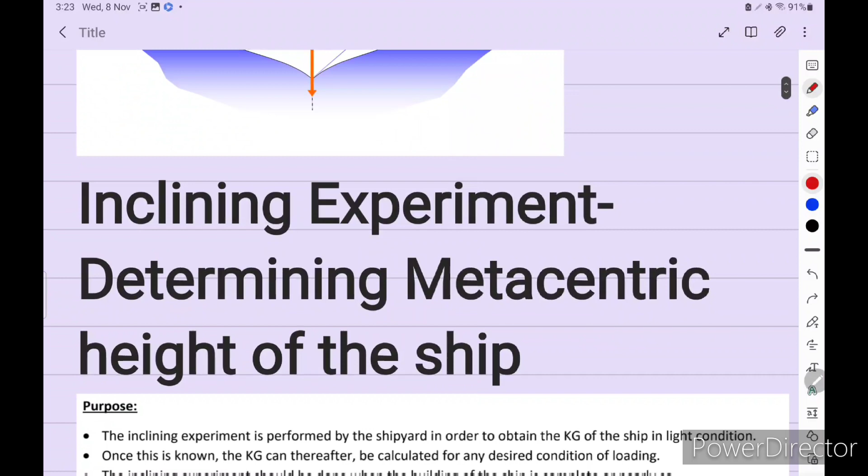Okay, so inclining test, inclining experiment, for determining metacentric height of the ship.

What is the purpose of this test? The inclining experiment is performed by the shipyard in order to obtain the KG of the ship in light condition. This is performed by the shipyard when the vessel is ready to launch, and it is done in the presence of class and flag state. Once this is known, the KG can thereafter be calculated for any desired condition of loading.

The inclining experiment should be done when the building of the ship is completed or nearly completed.

What is the principle? 2 or 3 long pendulums are rigged on the center line of the ship, one forward, one midship and one aft. List is created by moving several known weights, usually 2 or 3. Results obtained by different pendulums are averaged. By knowing the deflection of the pendulum, plumb length, KM, displacement including known weight, and distance moved, the initial GM is calculated. The calculated GM is then GM fluid for that condition.

What is the procedure of this test? The 2 or 3 long pendulums are rigged on the center line of the ship, one forward, one midship and one aft. The bob is immersed in oil or water to dampen out oscillations. A horizontal batten graduated in centimeters is fitted above the plumbs.

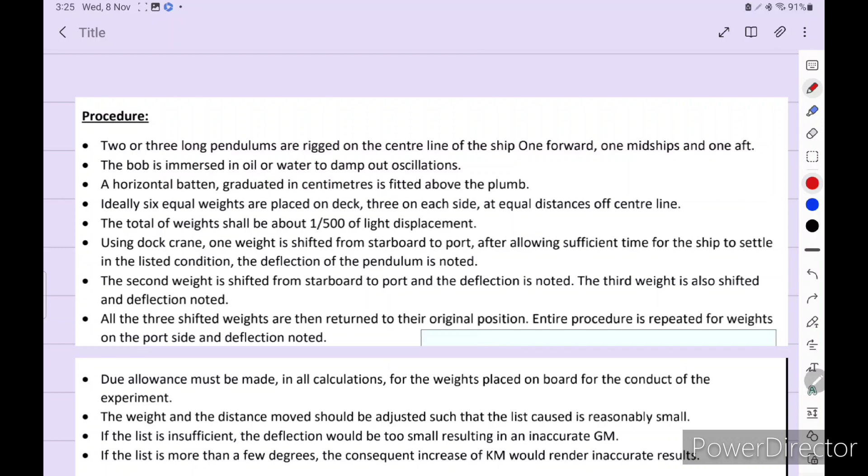Now the question is also what precautions you should take while conducting the experiment. So we have some precautions. Before the commencement of the experiment, the ship should be perfectly upright. A large trim should be avoided.

The ship's initial GM should not be too small. There should be no wind. If this is not possible, the ship should be headed into the wind. All mooring lines to be slack, gangway to be well clear of jetty, no other craft to be alongside. The depth of water should be enough to ensure the ship is freely afloat throughout the experiment.

All portable beams, derricks, boats, etc. to be in proper seagoing condition. Any loose weight to be secured. All personnel not directly connected with this experiment should be ashore. Those on board should stay on the center line.

Boilers are to be completely empty or full. As far as possible, all tanks should be fully full or empty. If not possible, the value of free surface effect should be noted. All bilges to be dry, drafts forward, aft and midship, and the density of water to be noted accurately. All persons doing this experiment should wear the proper personal protective equipment.

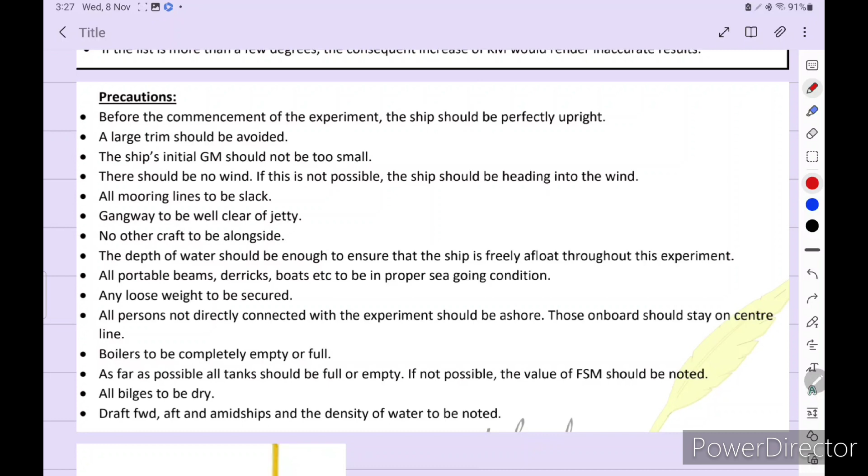Okay, so all these precautions should be taken care of. And this is a pendulum which we need to put in oil or water to dampen oscillation.

Okay, so this is a triangle. If you see this triangle ABC, tan theta is equal to BC upon AB.

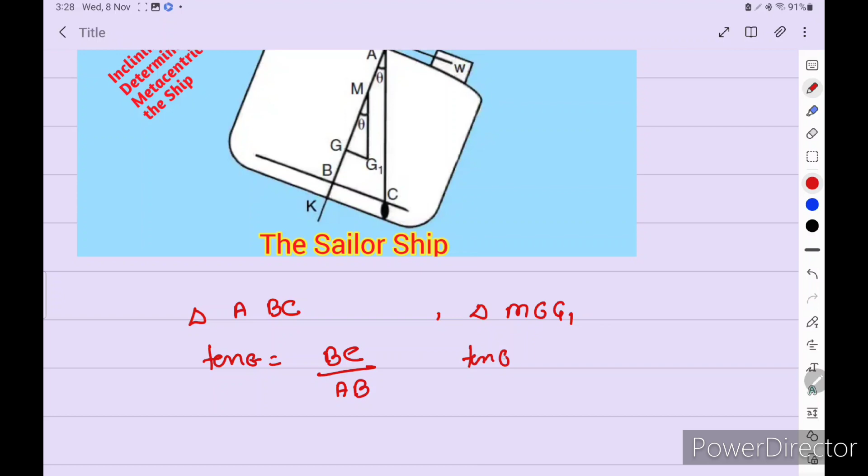And in triangle MGG1, tan theta is equal to GG1 upon GM. So tan theta is common, so BC upon AB is equal to GG1 upon GM. So GM is equal to AB into GG1 upon BC.

Now since we know that GG1 is equal to W into D upon displacement, so GM equals W into D upon displacement into AB upon BC. So this is the formula of the inclining experiment.

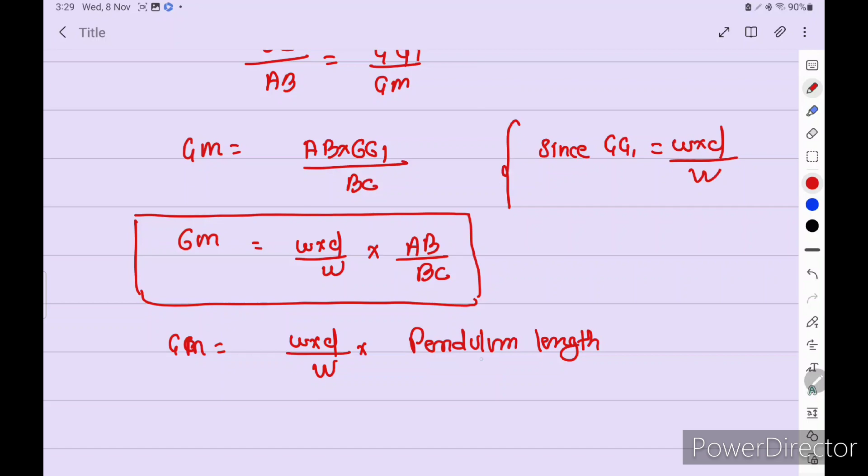Now, GM is equal to, what is AB? AB we call the pendulum length, so GM equals W into D upon displacement into pendulum length, divided by BC, the deflection. So our formula is this one. This formula we are going to use in the numerical.

Okay, what is W, small w? Weight shifted, port to starboard, starboard to port for the experiment. D is the distance through which it is shifted.

Capital W is final displacement. So we know the W, small w, we know the D, we know the total displacement. Deflection we find out from the experiment, and pendulum length we know. So all we know, so that we can find out GM. And when we find out the GM, the KM is provided by the naval architecture, and we know the KM, we know the GM, we can find the light ship kg, which is required of this experiment. The whole experiment is to find out the light kg of the vessel.

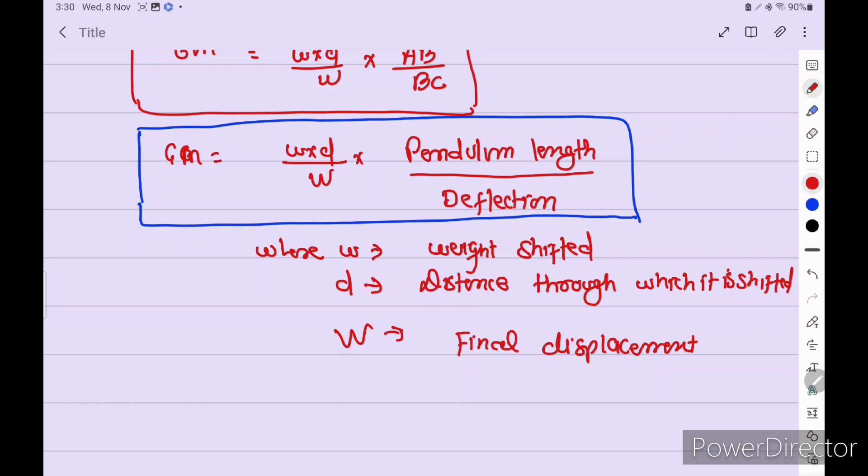Now we are going to do some past paper, so that you will be able to solve this type of numerical. For a displacement of 4000 ton, a mass of 12 ton is shifted transversely across the deck. A deflection of 75 mm in a plumb line of 7.5 meter was observed. If the km is 10.2 meter and the kg is 7 meters, find the distance through which the weight is shifted. Okay, so let's solve this.

What is given in the question? Displacement 4000, mass of 12 ton, so small w is 12 ton, shifted across the deck. A deflection is given here: 75 mm, so we need to convert in meters, all should be in 1 unit, so 0.075 meter. Plumb line is already given in meter, plumb line is 7.5 meter. Km is given, kg is given, so you can write km is 10.2 meter, kg is 7.0 meter.

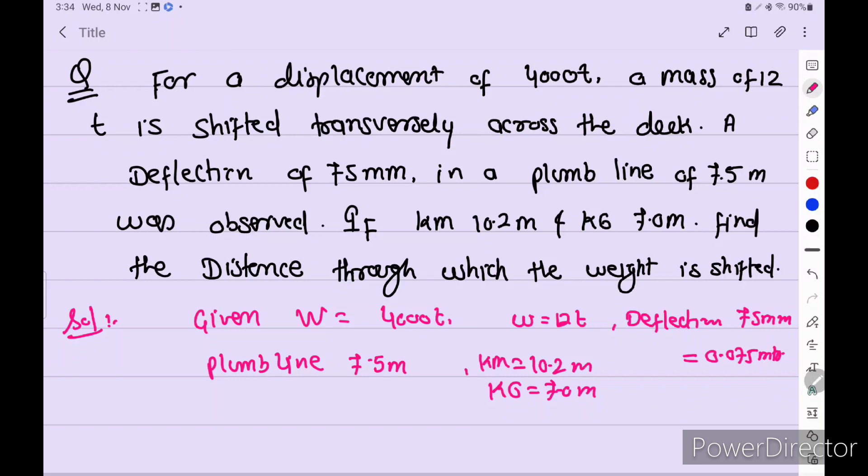Find the distance, that means D, we need to find D through which the weight is shifted. So our formula is, first km is given 10.2 meter, kg is given 7 meter, so GM we can find out, 3.2 meter. Now since we know that formula, GM is equal to W into D upon displacement into pendulum length divided by deflection.

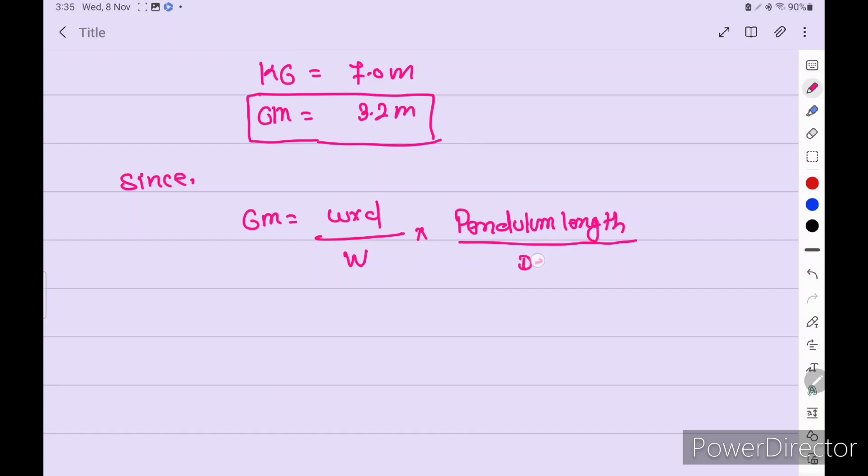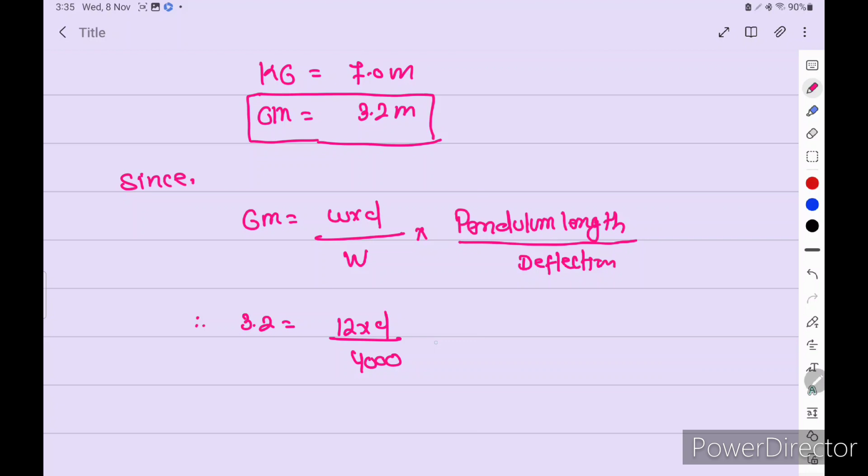Now put the formula. GM is 3.2, we just calculated. D we don't know, we have to find out. 4000 into 7.5 divided by 0.075. Cross multiplication: 3.2 into 4000 into 0.075 is equal to 12 into D into 7.5. So we get 960 is equal to 90 D. So D is equal to 10.67 meter.

Okay, let's move to the next MMD question. An inclining experiment was conducted on MV Hindship with all tanks and compartments empty except 28 ton each of diesel oil in the number 7 port and starboard tanks, and also 12 tons each of fresh water in the tween deck drinking water tank port and starboard. When the inclining weight of 5.75 ton at kg 10.2 meter is shifted transversely through a distance of 16.95 meter, plumb line is 8 meter in length, deflection 5 cm. So plumb line is 8 meter and deflection is 5 centimeter, which we need to convert into meters. Calculate the light kg and GM of the vessel.

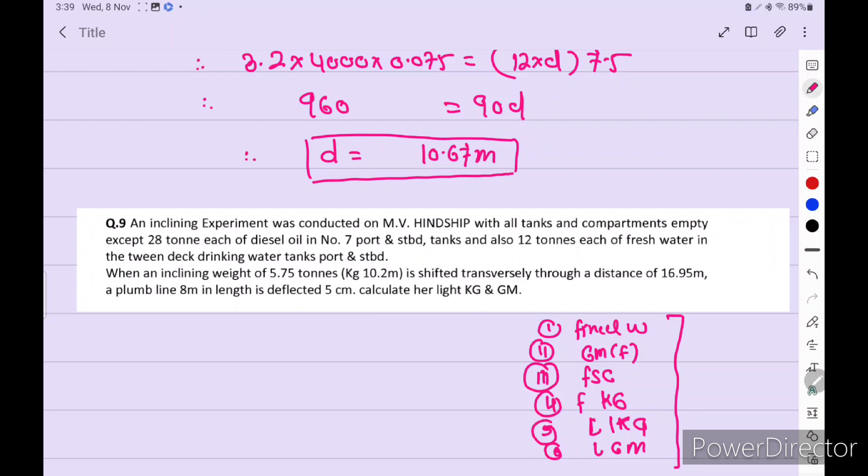In this type, generally the question comes this way only, so there is a procedure to do this. First we have to find out the final weight, then GM fluid, then we have to calculate the FSC, then we have to calculate the final kg, and then we have to find out the light kg, and then we have to find out the light GM. So this is the procedure. If you remember this procedure and solve 2-3 numericals, you will be comfortable solving this type of numerical. Let's solve this numerical.

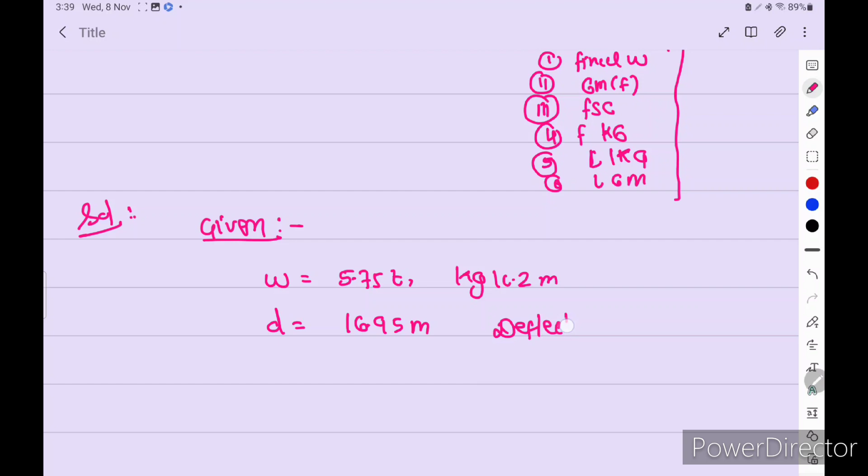What is given in the question, we have to write in examination, so that it makes a good impression for the examiners who will correct our paper. So small w is 5.75 ton, kg is 10.2 meter, d is 16.95 meter, deflection is 5 cm, so we need to convert into meters, and plumb length is 8 meters.

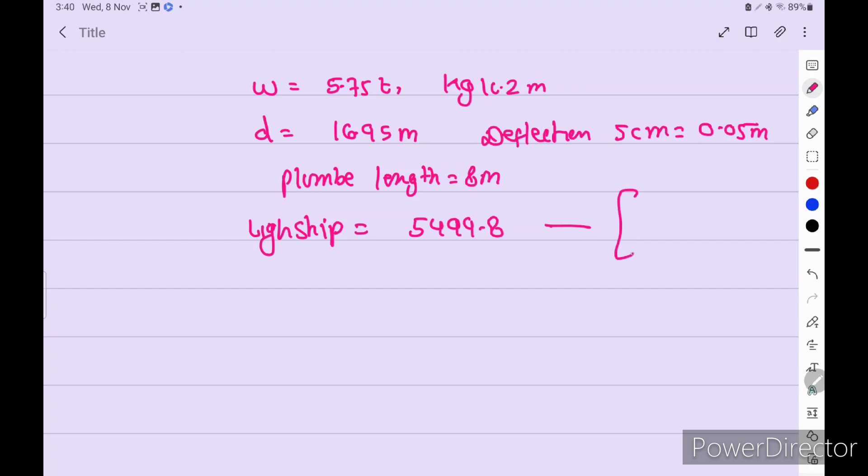Now from the MV Hindship particulars we need to find out the light ship. It is given on the first page, also in condition number 7 you find the light ship displacement. From MV Hindship particulars, or the first page where the LBP is given, you can find out the light ship displacement: 5499.8, this you have to remember, this is fixed, or you can find out from the MV Hindship particulars. Now the number 7 port and starboard is 56 ton.

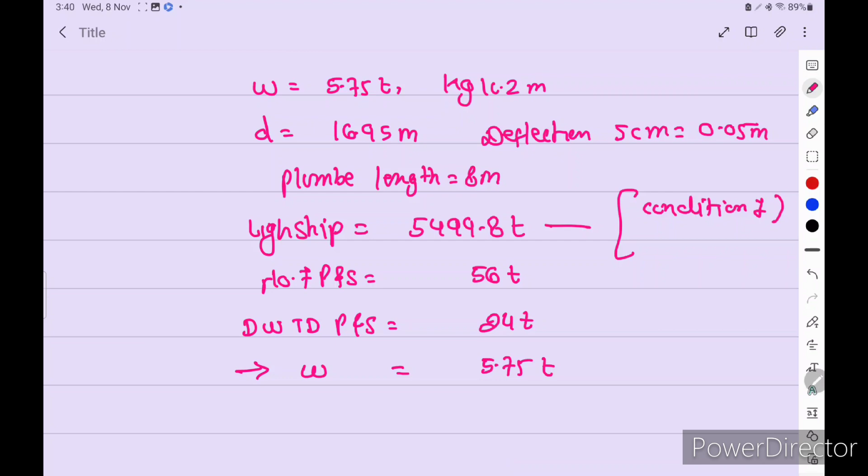Drinking water tween deck port and starboard equal to 24 tons. Small w is given 5.75. Never forget this small w, this is very important, otherwise your answer will become wrong. So small w is also we have to consider.

So final displacement is equal to, we have to add all this. Final displacement is 5585.55 ton. Okay, this is final displacement.

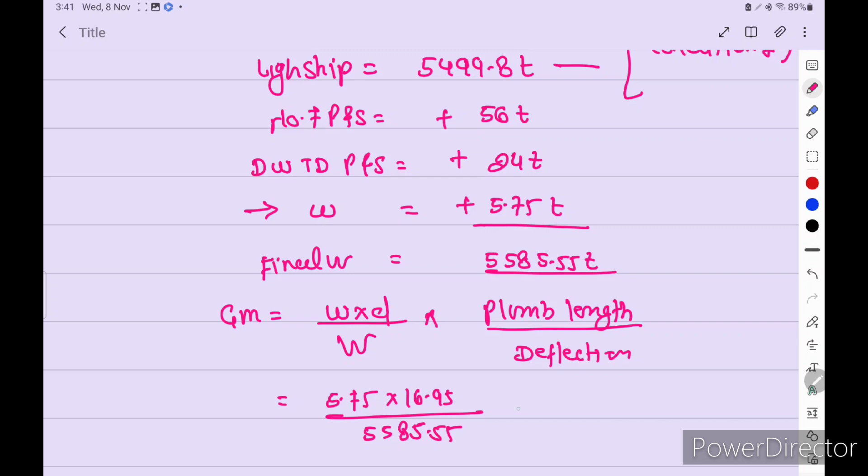Now for our formula, GM is equal to W into D upon displacement into plumb length divided by deflection. Put the value in the formula: 5.75 into 16.95 divided by 5585.55 into 8 divided by 0.05.

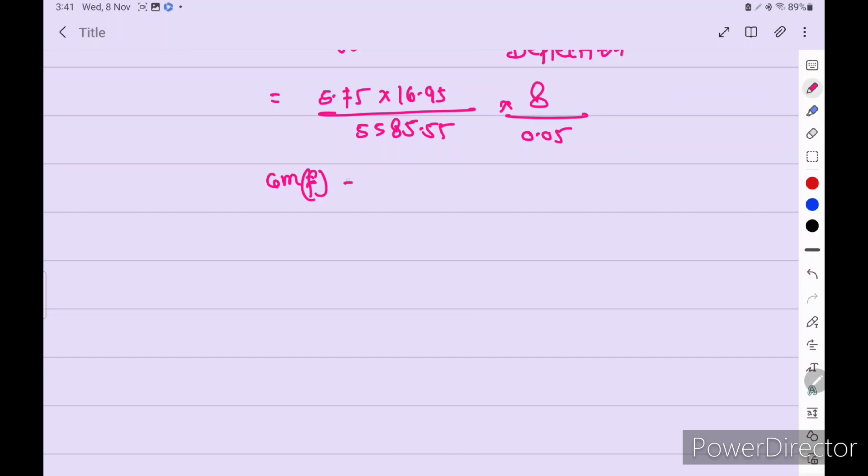So GM fluid we get 2.792 meter.

Okay, now we need to find third step, FSC. So what is FSC formula? I into DI.

Okay, now DB tank, 7 port, 50 into 0.88. This 50 we have to find out from the MV particulars, and 0.88 is the density, so we multiply and we get 44. 7 starboard is 33 into 0.88 is equal to 29.04, so we need to add this, 73.04.

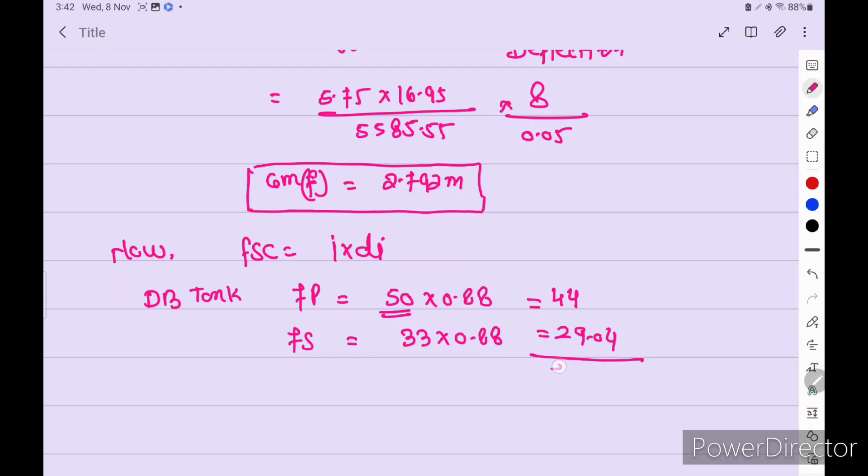Drinking water tank port is equal to 37 into 1, so 37. Fresh water density 1, and the FSM we have to find out from the MV particulars. Starboard side 42 into 1, so 42. Addition, so 79. Now we have to add the total FSM.

73.04 plus 79, so it's equal to 152.04. Now FSC is equal to FSM upon final displacement, so 152.04 divided by final displacement 5585.55. So our FSC is equal to 0.027 meter.

Okay, now for the final displacement 5585.55, we need to find out the Km from the MV particulars. So GM fluid we already calculated, 2.792 meters. FSC we calculated, 0.027. Now before we are going like this, Km minus Kg is equal to GM solid minus FSC is equal to GM fluid.

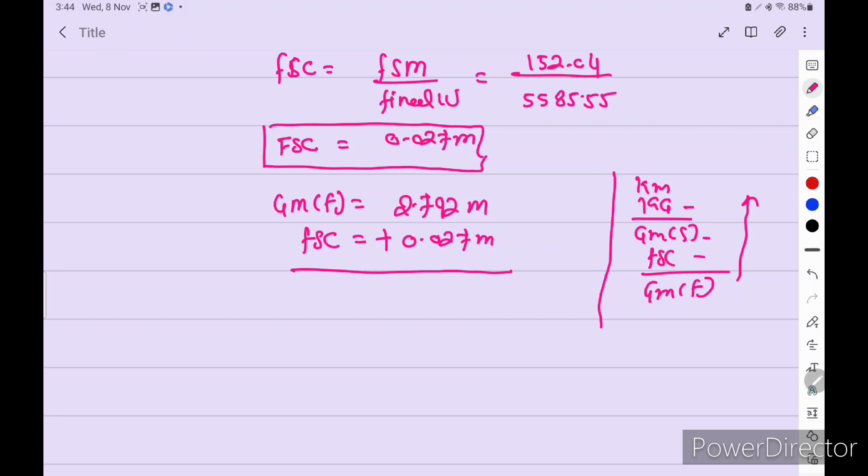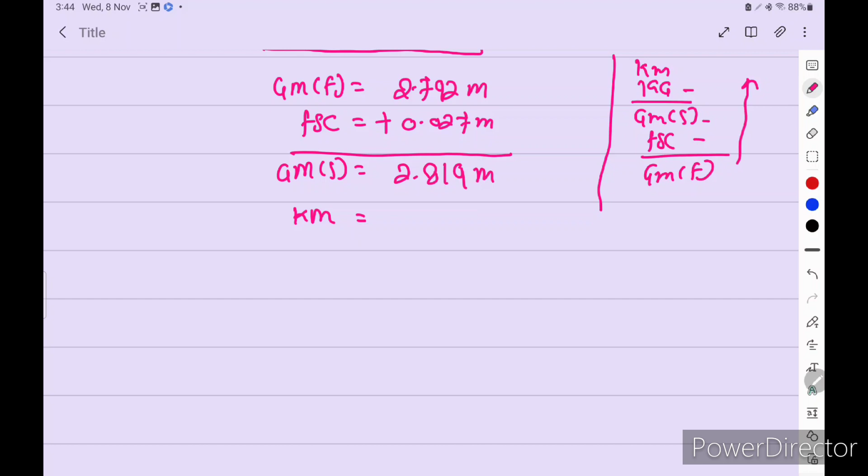Now we are going to the opposite side, so we need to add. So GM solid we get 2.819 meter. Now from the MV we have to find out the final displacement's Km, so in that case I get 11.561 meters. So final Kg, Km minus GM solid, we get final Kg 8.742 meters.

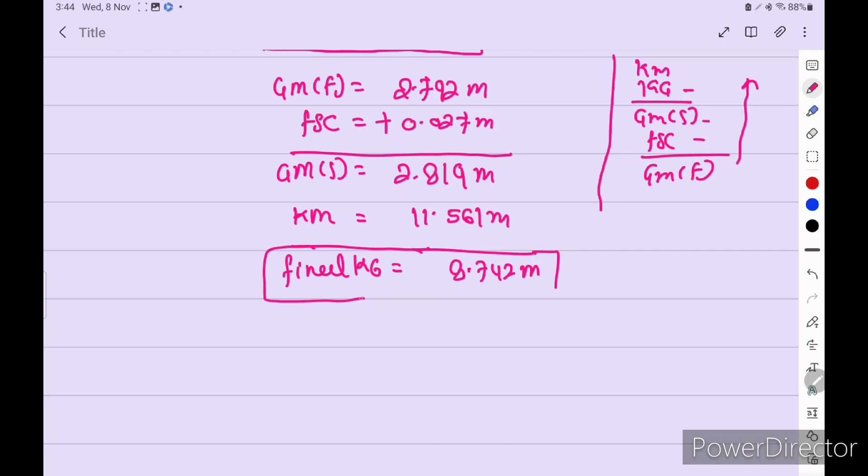But we need to find out the light Kg of the vessel. So now we go by the moment method. So W, displacement, Kg, and vertical moment.

So final displacement 5585.55, final displacement. The Kg is 8.742. Okay, this is given in the MV Hindship. This we calculate 8.742 from here.

Now 7 port is 30 ton, 7 starboard 30 ton, drinking water tank port minus 10 ton, drinking water tank starboard minus 10 ton, and the small W 5.75 ton. So we get light 5499.8.

It should be 5499.8, your light ship displacement. Put the Kg, you can find out from the MV particulars. And the small W is given Kg in the question.

So cross W into Kg, cross multiply, and you will get the vertical moment, 4882, 8.878. We have to keep 3 decimal digits after the decimal. Minus 73.36, minus 72.52, minus 134.28, minus 134.76, minus 58.65.

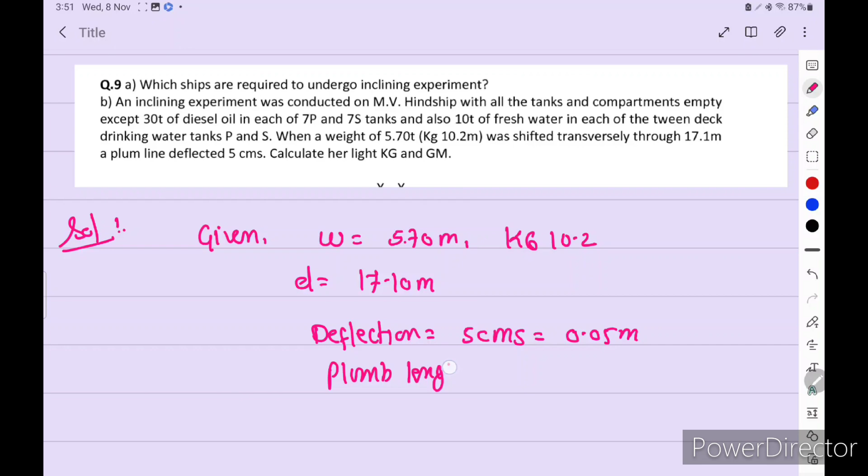So what is given in the question? Small w is 5.70 meter, kg is 10.2, capital D is given as 17.10 meter, deflection 5 centimeters is equal to 0.05 meter, plumb length 8 meter.

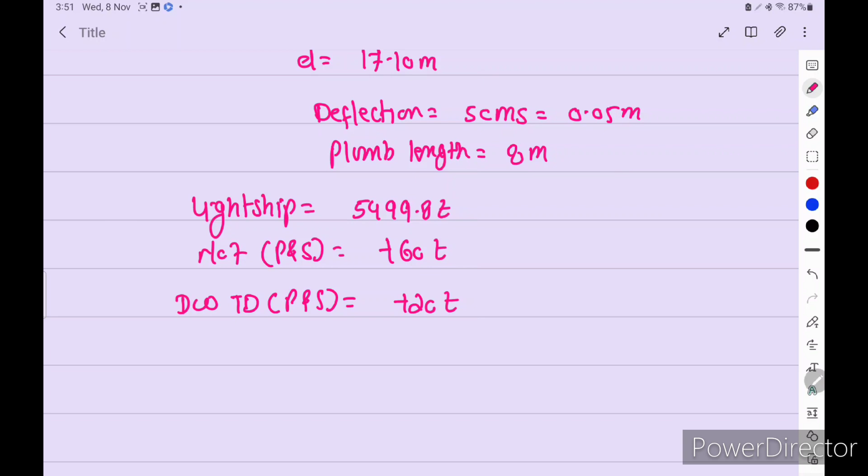So light ship is equal to 5499.8 ton. Number 7 port and starboard plus 60 ton. Drinking water tween deck, port and starboard 20 tons. The small w given in the question is 5.70 ton. Add all the values, so 5585.5 ton is the final displacement.

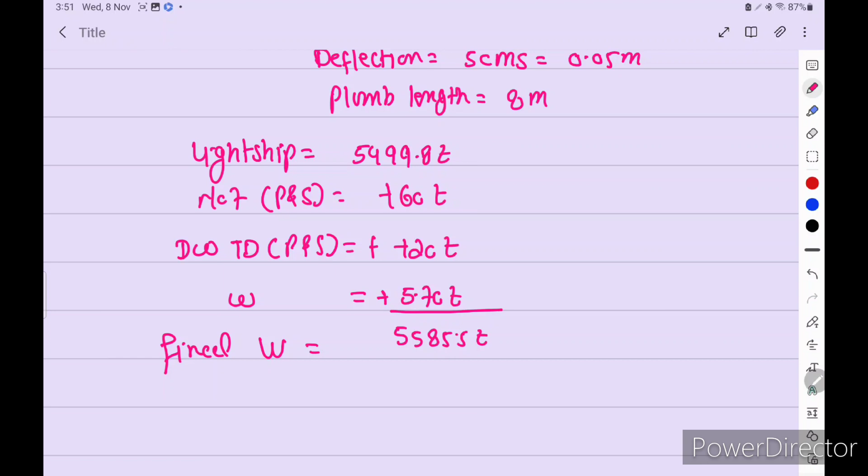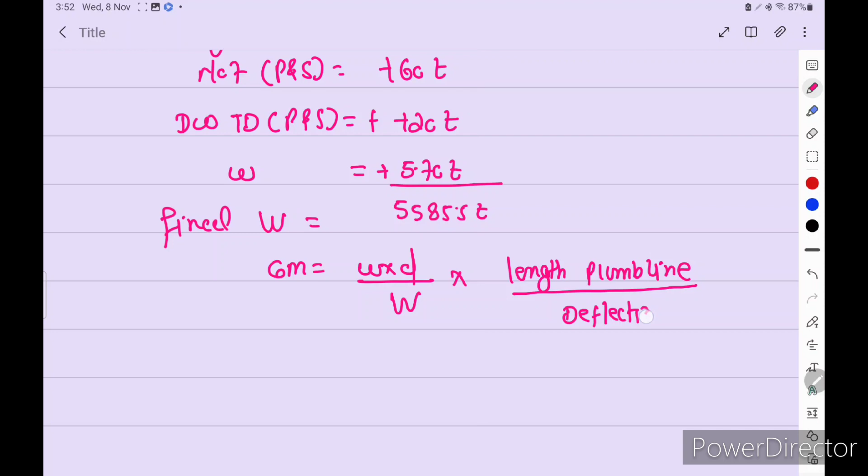Now put the value in the formula, the inclining experiment formula. Gm is equal to small w into d, divided by capital W, into length of plumb line, divided by deflection. So 5.70 into 17.10 into 8 divided by 5585.5 into 0.05. So GM fluid we get 2.792 meter.

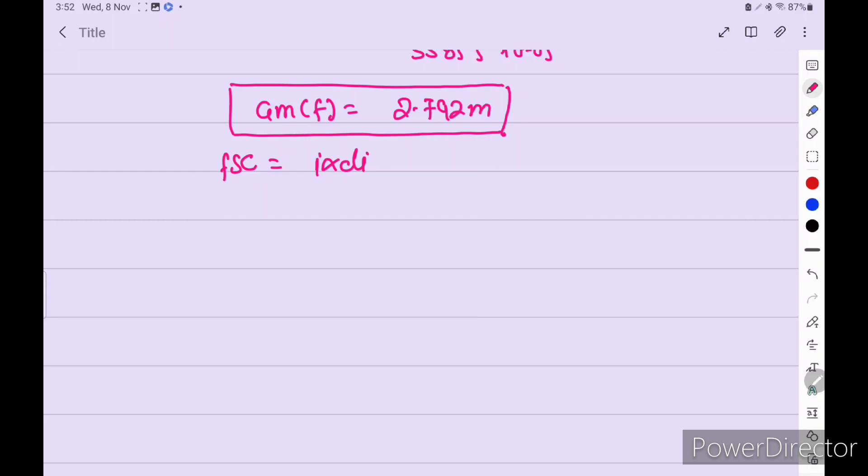Now we have the third step, I into D, FSC. Now we need to calculate FSM. So 7 port and 7 starboard: 50 into 0.88 and 33 into 0.88. 0.88 is density of fuel and 50 is FSM. Now add this, 73.04.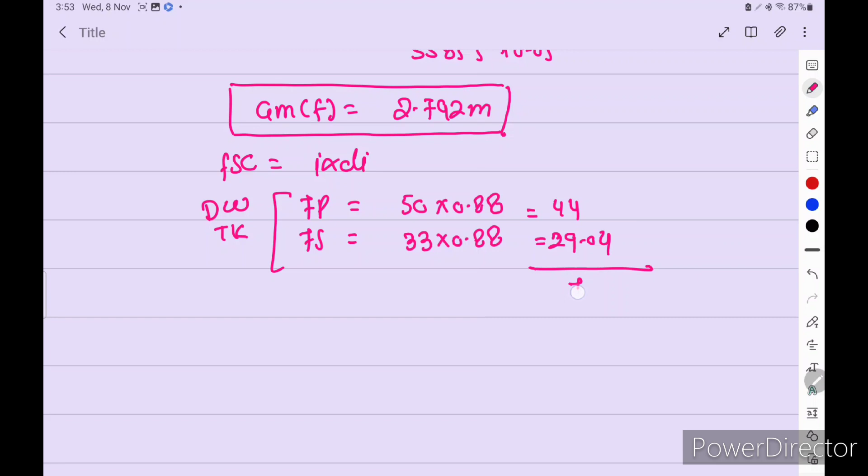Drinking water tank, port and starboard: 37 into 1 is equal to 37, and 42 into 1 is equal to 42. Add, 79. Now the total FSM is equal to, we add both: 73.04 plus 79 is equal to 152.04.

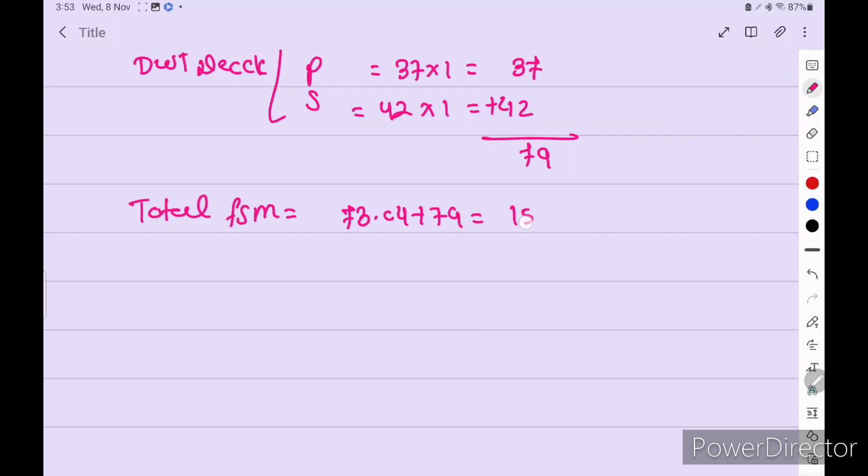The final FSC is equal to final FSM divided by final displacement. So 152.04 divided by 5585.5. So final FSC is equal to 0.027 meter.

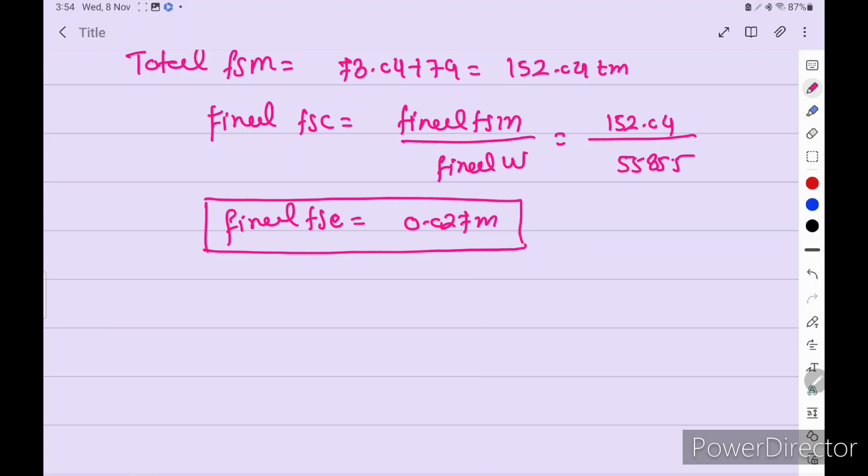Okay, now we find out the final kg. So GM fluid 2.792 meter, FSC 0.027. Now we have to add because we are going to the opposite side: 2.819.

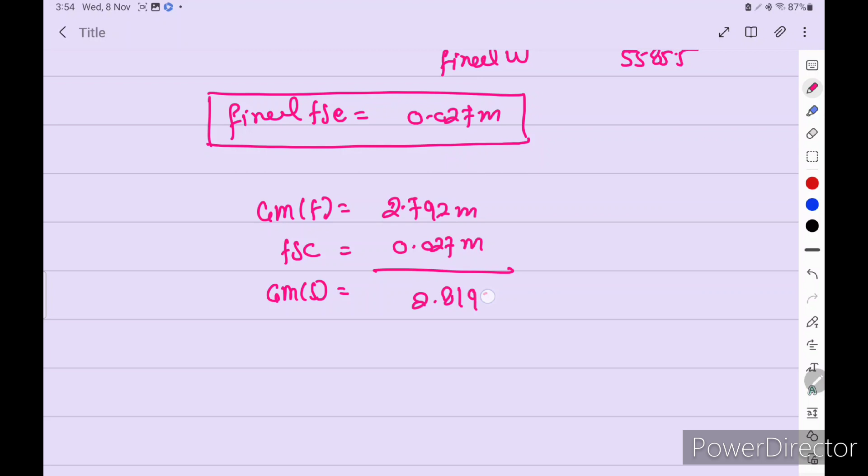Km we can find out from the MV Hindship particulars for the final displacement, and we get the final kg of the vessel, 8.742 meter.

Now we need to find out the light kg, so we need to use moment method. Now W into kg is equal to vertical moment. Final displacement 5585.5, kg is 8.742, multiply and we get...

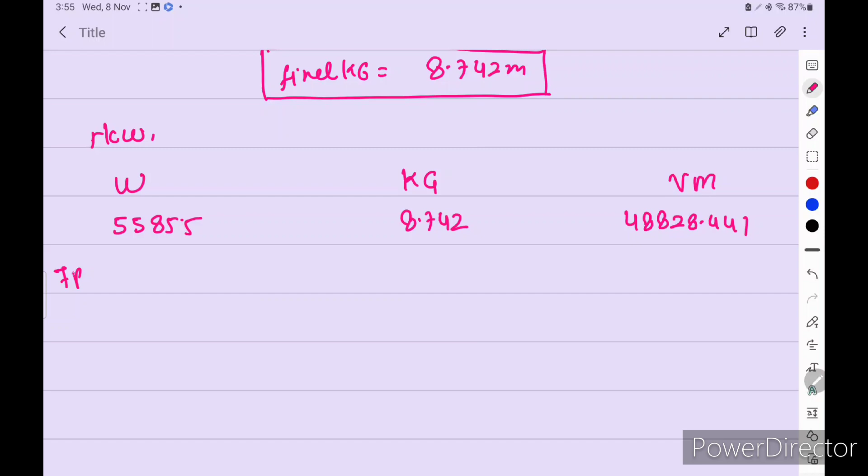48828.441. Now number 7 port, final displacement minus 30 ton, kg is 2.62 from the MV Hindship particulars. Number 7 starboard minus 30 ton, 2.59, minus 77.7. Drinking water tank port minus 10 into 11.19, multiply 111.9. Drinking water tank starboard is minus 10, 11.23, multiply 112.3. The small w given in the question is 5.70, kg is also given, multiply 58.14.

Now we get the value 48389.801, and here we get 5499.8 ton. Now the light ship kg of the vessel is equal to light ship vertical moment divided by light displacement.

So 48389.801 divided by 5499.8. So light ship kg is 8.798.

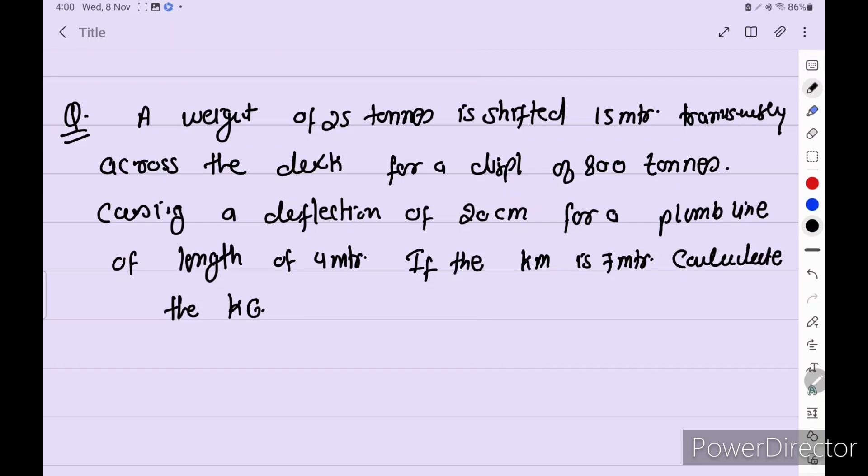Okay, a weight of 25 ton is shifted 15 meters transversely across the deck for a displacement of 800 tons, causing a deflection of 20 centimeters for a plumb line of length 4 meter. If the km is 7 meter, calculate the kg. Okay, this is also simple.

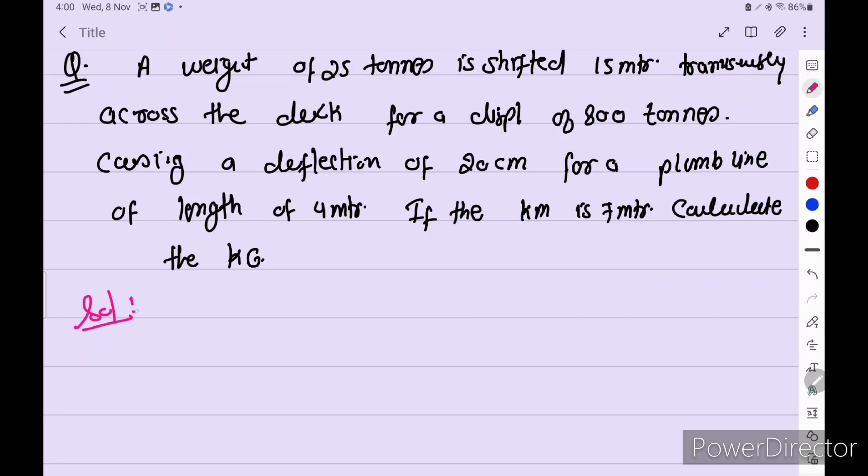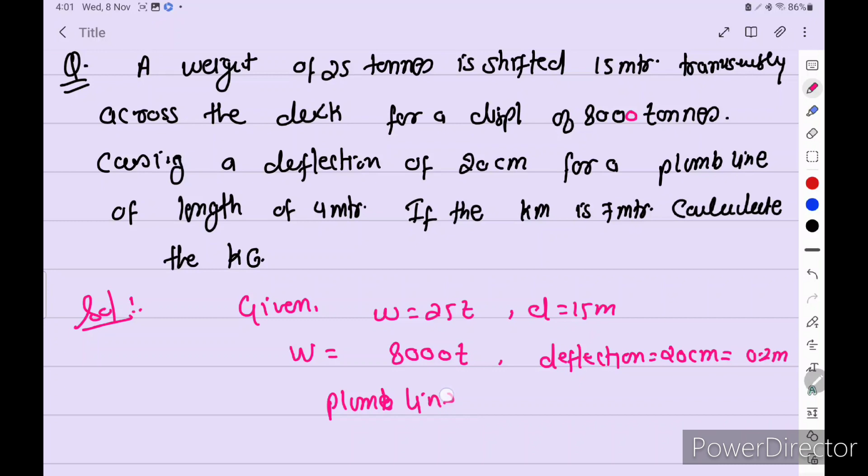What is given in the question? We have to write small w is 25 ton, d is equal to 15 meter, final displacement is 8000 tons, deflection 20 centimeter needs to be converted in meters, 0.2 meters, plumb line 4 meters, km 7 meters, calculate kg.

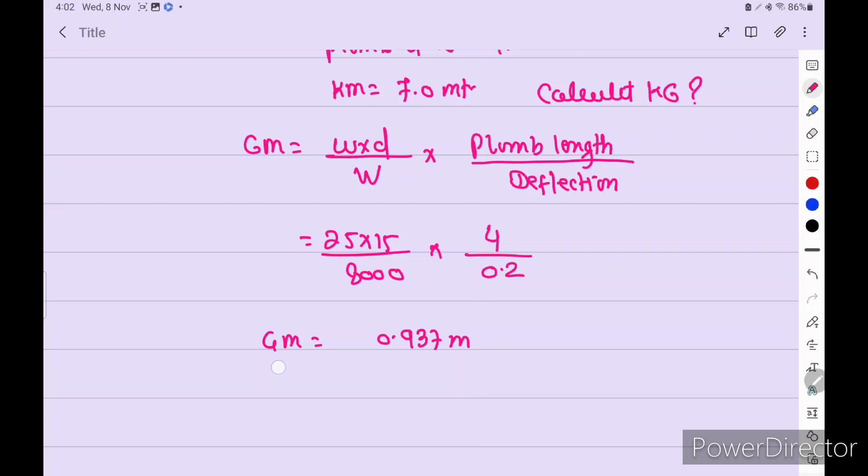Put the value in the formula. Gm is equal to W into D, upon final displacement into plumb length, divided by deflection. 25 into 15 divided by 8000 into 4 divided by 0.2. So Gm is equal to 0.937 meters. Km is given in the question, 7.000 meter.

So light kg is equal to 6.062 meters. Okay, so let's move to one more numerical.

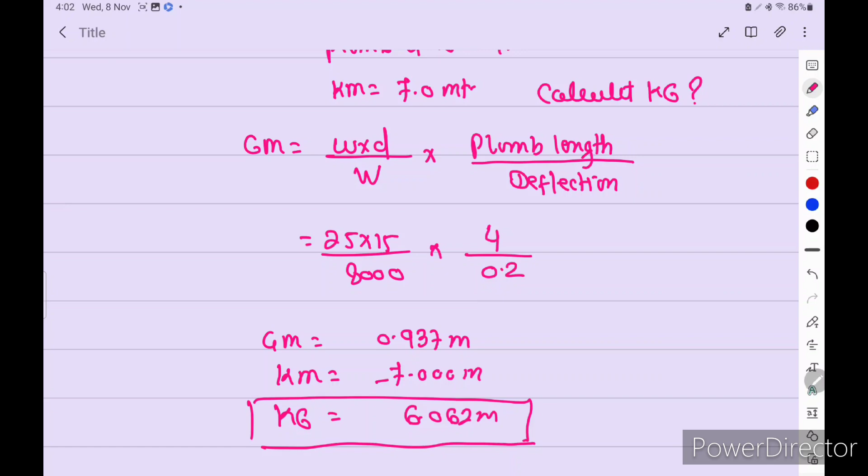Our next question is also from general stability. A ship of displacement 8000 ton, km is 7.3, kg is 6.1 meter. A weight of 25 ton is moved transversely across the deck through a distance of 15 meter. Find the deflection if the length of plumb line is 4 meter. So here we have to find out the deflection.

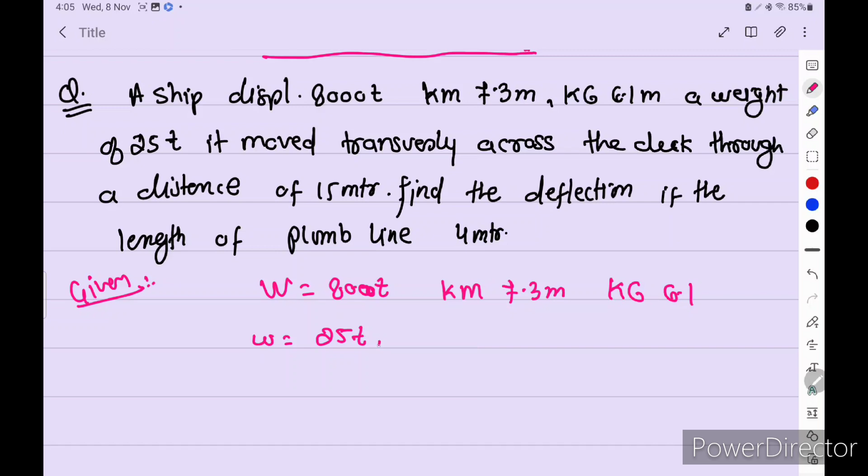So given in the question is final displacement is 8000 ton, km is equal to 7.3 meter, kg is equal to 6.1 meter, small w is 25 tons, and d is 15 meters. Deflection we don't know, we have to find out. And the length of plumb...

4 meter. Now since we know that Gm is equal to Km minus Kg, so 7.3 minus 6.1 is equal to Gm is equal to 1.2 meter. Now put the value in the formula: Gm is equal to W into D, capital D, into plumb length divided by deflection.

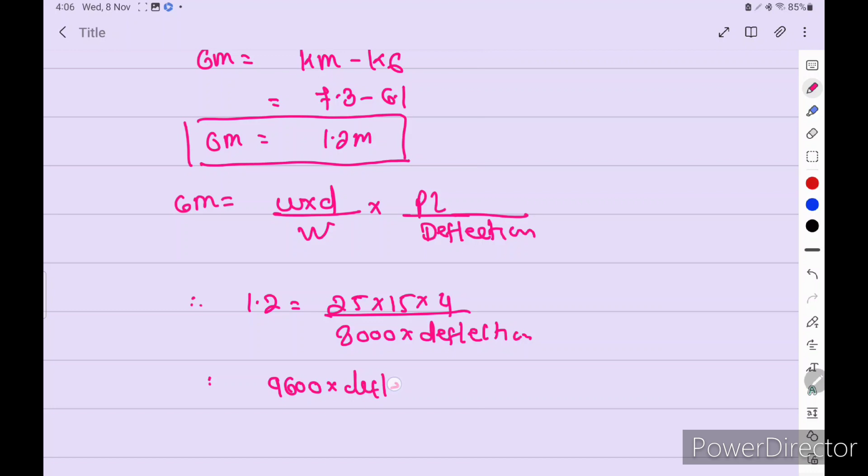So therefore put the value: 1.2 is equal to 25 into 15 into 4 divided by 8000 into deflection. Now cross multiplication, so 9600 deflection is equal to 1500. So therefore deflection is equal to 1500 divided by 9600. So deflection we get 0.156 meter, but we need to convert this into centimeter. So 15.62 cm. This is also from the past MMD paper.

Okay, let's move to the next question.

From an inclining experiment, it was found initial GM is 1 meter and a weight of 10 tons shifted 12 meters transversely, a list of 3.5 degrees was observed with a deflection of 25 centimeters. Find the displacement and length of the plumb line. So here two things we have to find out: one is final displacement and one is the length. We cannot use the formula directly for the length because two things are missing. So first we have to find out the final displacement.

Since we know, we have to apply the list formula: tan theta is equal to w into d upon W into GM. Tan 3.5 degree is given in the question, equal to 10 into 12 upon W into 1. Now cross multiplication, so 0.061 into W is equal to 120. So therefore W is equal to 1963.99 ton, which is equal to 1964 ton.

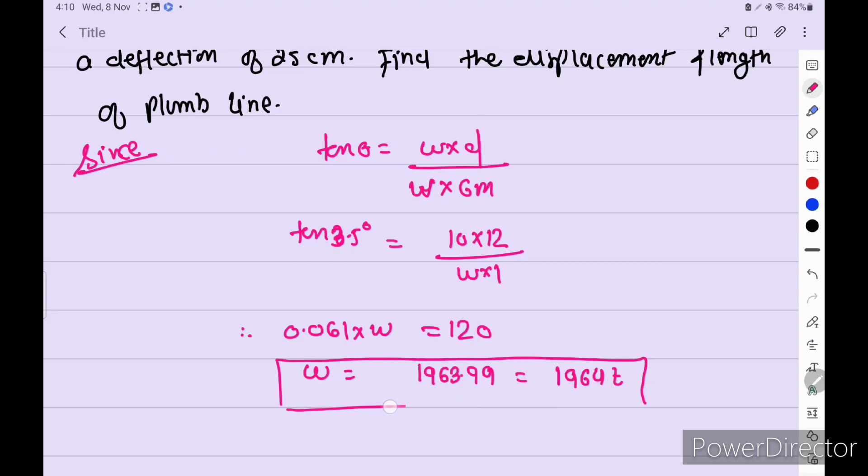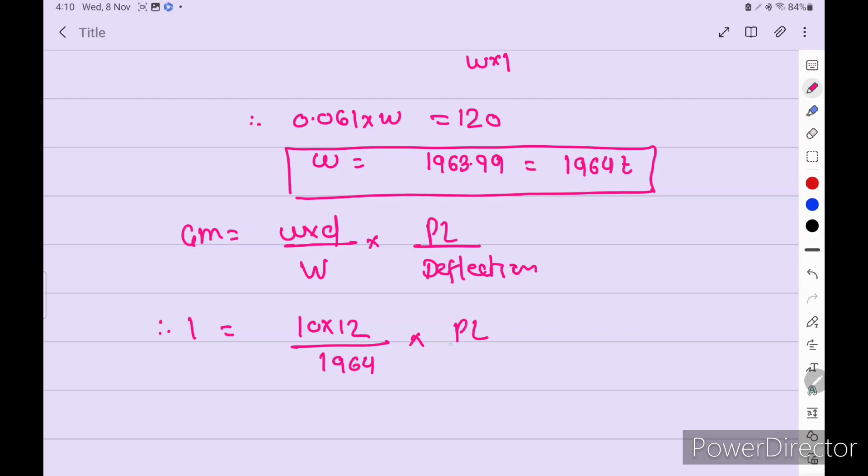Okay, so we found out the final displacement. Now we have to put it in the formula of the inclining experiment. So GM is equal to 10 into 12 divided by 1964 into plumb length we have to find out, divided by deflection 0.25. So therefore 120 into plumb length is equal to 491. Therefore plumb length is 491 divided by 120. Therefore plumb length is equal to 4.092 meter.

Okay, so the next question is a little bit tricky. It's coming from Simpson's rule combined with the inclining experiment. So it's simple, if you see this I will explain you how to solve. It's very simple.

When a weight of 20 tons moves 12 meters across the deck of the vessel, for which the following data is applied: the vessel is inclined 0 degree 24 minutes. Find the KG as inclined if the vessel is floating at even keel draft of 8 meters. So even keel draft is 8 meters given in salt water. Underwater volume is 15,000 meter cube. KB is 4.7 meter. Length of water plane is 120 meters. Half ordinates are as follows: 0, 1, 2, 3, 4, 5, 6, values of 0, 7, 8, 9, 9, 6, 0. We need to find out the light KG.

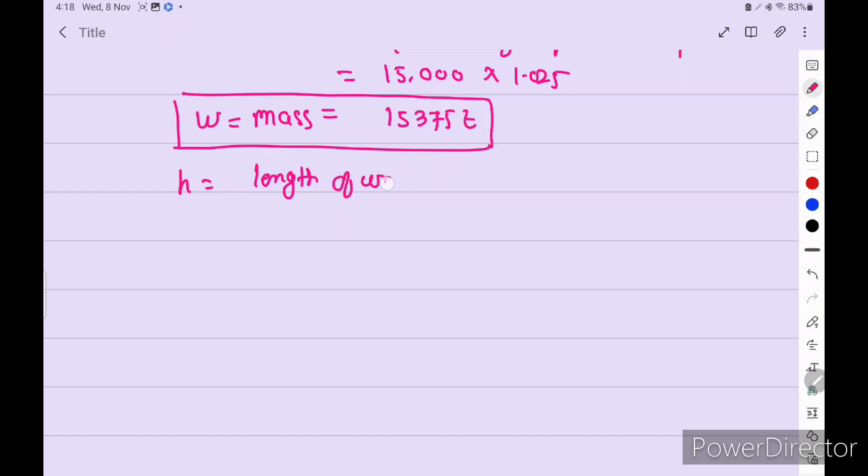Okay, now we have to resolve this to find out the moment of inertia, because moment of inertia, why do we find it? We need to find out the BM. So H is equal to, by Simpson's rules, H is equal to length of water plane divided by number of ordinates minus 1. Okay, so 120, number of ordinates 7 minus 1, so 120 divided by 6, so H is equal to 20 meter.

Okay, now we have to find out the MI, moment of inertia. So half ordinates, Simpson multiplier and product. So half ordinate, write the half ordinates value: 0, 7, 8, 9, 9, 6, 0. So it is 7, so apply for both, Simpson rule number 1 and rule number 2. If you have any doubt in Simpson's rule, my videos for Simpson's phase 1 and phase 2 are also available on YouTube, so you can watch those. Okay, so Simpson multiplier 1 4 2 4 2 4 1 we used. Now multiply and we get 0, 28, 16, 36, 18, 24, 0.

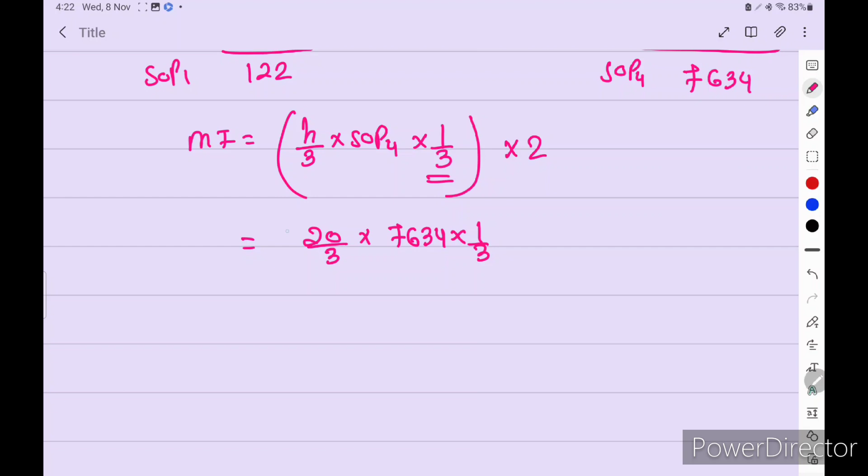H by 3 is used to find the area. So H is, we calculate 20 by 3 into 7634 into 1 by 3. When we calculate moment of inertia, we need to use 1 by 3. Since this is half ordinates, to make it full we multiply by 2. So moment of inertia is equal to 33928.888 meters to the power 4.

So BM is equal to MI upon volume: 33928.888. Volume is 15,000 given in the question. So we find out 2.262 meters.

So if you see, Simpson's rule is used only for calculating the BM. Now after BM, everything becomes normal. So KM is equal to KB plus BM. KB is given in the question as 4.7, plus 2.262 BM we just found. So we find that KM is 6.962 meters.

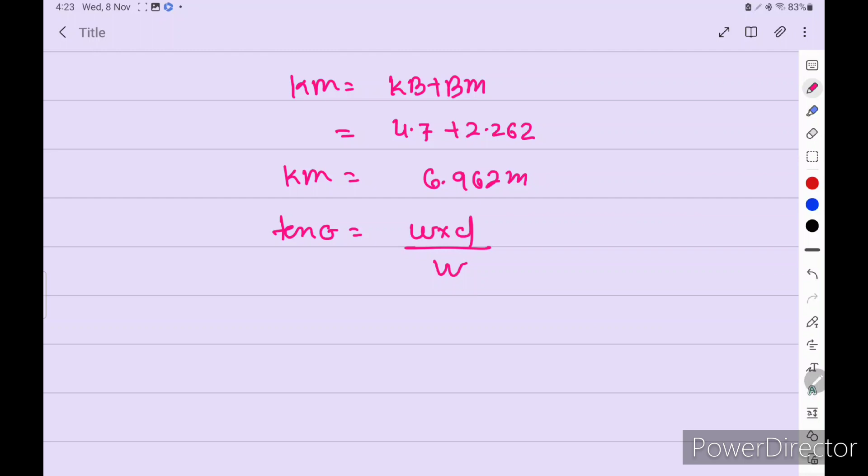So tan theta is equal to W into D upon final displacement. Now tan 0 degrees 24 minutes is given in the question, 20 into 12. Final displacement we found, into GM, which we don't know, so we need to find GM.

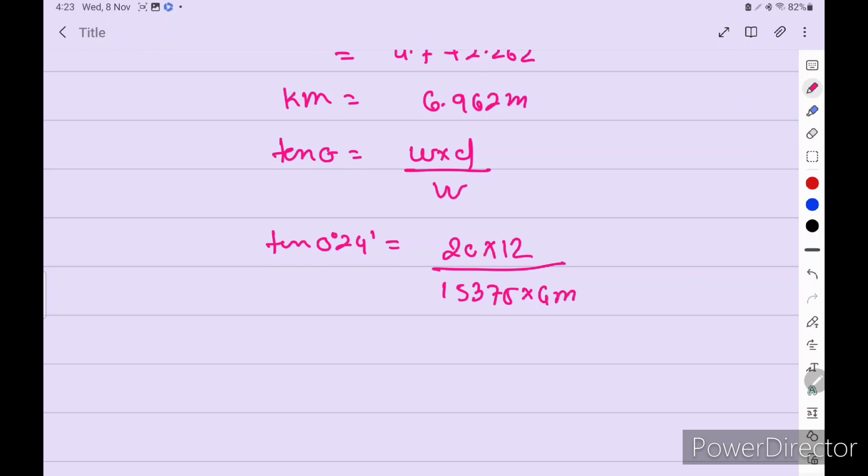107.339 into GM, cross multiplication, and we get the GM value 2.236 meters. KM we already know is 6.962 meters. So KG light of vessel is 4.726 meters. This is our answer.

So the only difficulty is in finding the BM, and that's also simple. If you see my Simpson's video, you will clear your doubts. Still, if you have doubt, write me in the comment box.

So we'll solve one or two questions from the past paper for MMD, for the MV Hindship. Then I will give you some homework so you can solve also.

So if you see, this question is question number 1, meaning it can also come in part A. MV Hindship was floating with all compartments empty except as follows: Number 2 port and starboard DB tank full with water ballast; Number 1 DB tank containing 100 tons of HFO. There is a correction in the question: HFO density is given as 0.95 and FSM is given as 414.

So in this question there is a correction. An inclining experiment was conducted in this condition. A weight of 10 tons, KG 10.2, was shifted transversely through a distance of 17.6 meters, causing a deflection of 8.3 centimeters. We need to convert this into meters. Plumb line is 8.5 meters in length. Calculate the GM solid and the KG of the light ship.

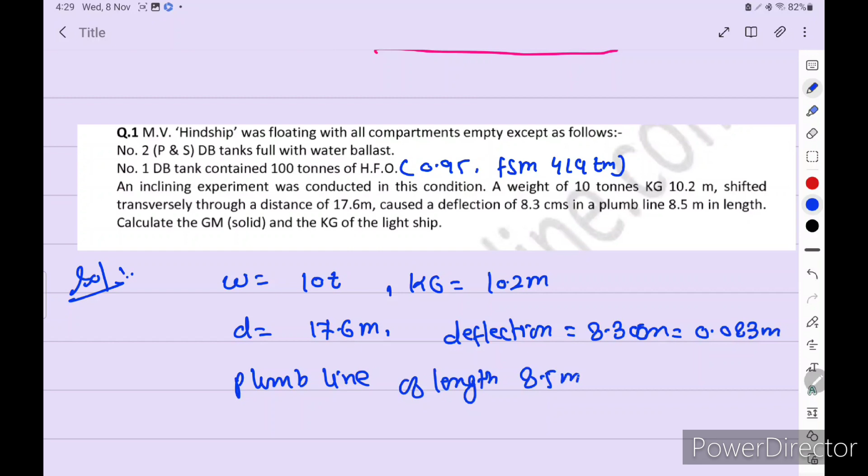0.083 meters. Plumb line is 8.5 meters. If you like this video, please share with your friends and subscribe.

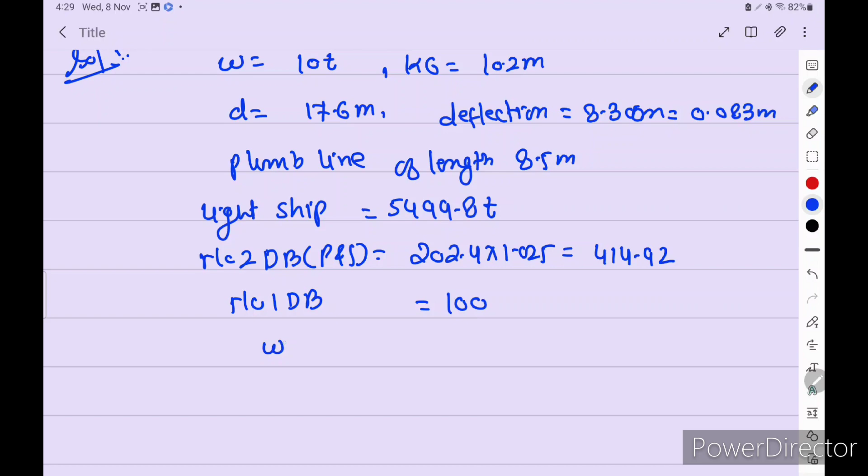Light ship KG and light ship displacement we get from the MV Hindship particulars condition. Light ship: 5499.8. Number 2: DB port and starboard, 202.4 into 1.025 equals 414.92. Number 1 DB is equal to 100 tons. Small W given in the question is 10 tons. Now we add all and get the final W, which is 6024.72 tons. Now we'll go to the second step, we have to find out the GM.

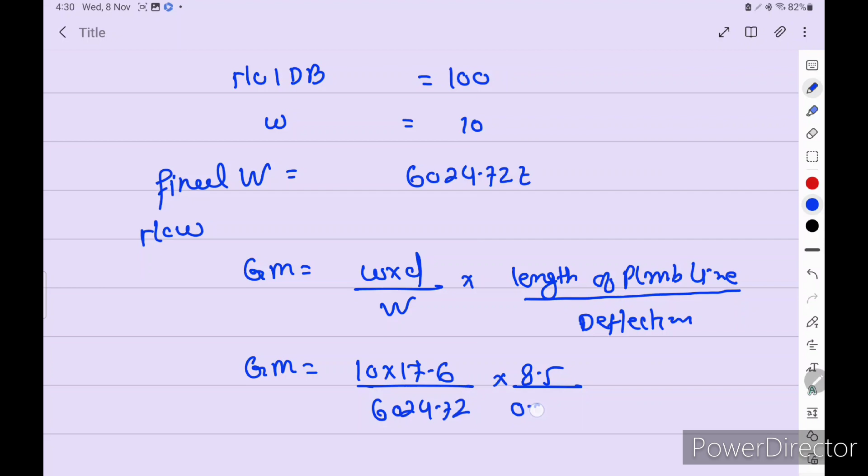Write the formula for GM: W into D upon final displacement into length of plumb line divided by deflection. Find the GM: 10 into 17.6 divided by 6024.72, into 8.5 divided by 0.083. So we get the GM as 2.992 meters.

Now the third step, we have to find out the FSM. So number 1, DB tank maximum capacity.

We have to find out the maximum capacity in the MV Hindship particulars, where 100% is given. We have to find out their value, then multiply by the density 0.95 to get the total mass we can occupy. This we all learn in the second mate.

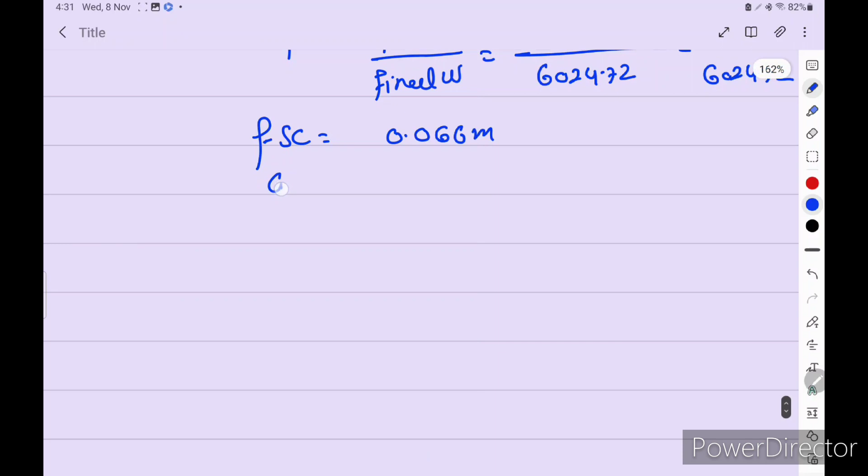GM fluid we calculated just now, and FSC we have, so we add to get the GM solid, 3.058 meter. KM from the MV Hindship particulars for the final displacement, and final kg is 8.055 meter.

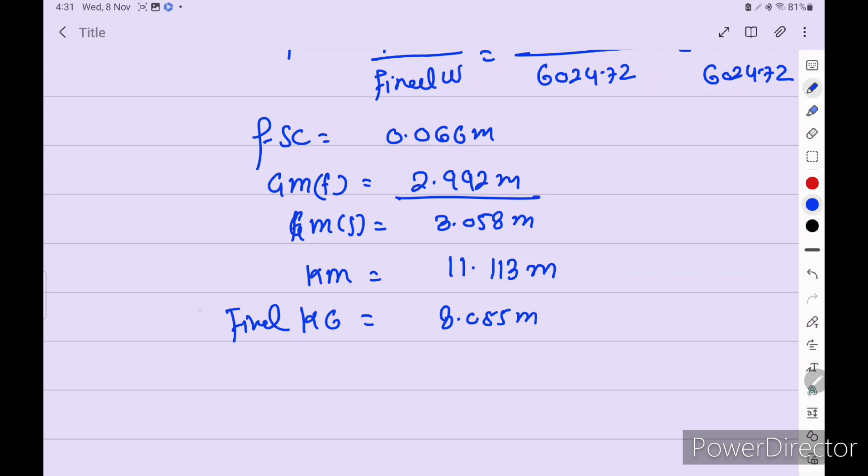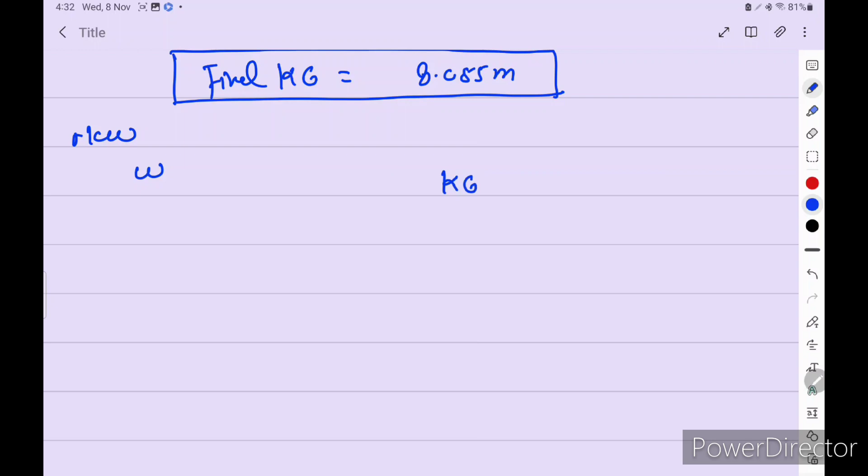Now we have to find the light ship kg, so we have to go by the moment method. Now W, kg and vertical moment. Final displacement 6024.72 kg is, just find out, 48529.119 cross multiply, number 2 DB port 207.46, number 2 DB starboard side 207.46, number 1 DB 110, small w 1010, and it should be equal to light ship, correct.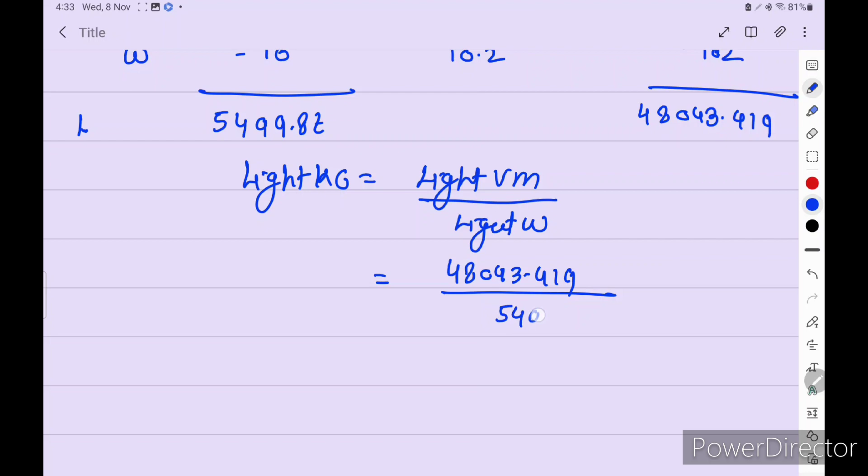Now the light kg: light vertical moment divided by light displacement. So light kg is equal to 8.735 meter. Light KM from the MV Hindship hydrostatic table, or you can find out also from condition number 1, the GM value is 2.916 meter, our answer.

This is also May 16. So I covered from 2023, November 23, and May 16. So you don't need to go verify this from the MMD paper. You can solve all this and practice. I'll give you some more which are similar but with values changed here and there.

If you give 1 hour, your 25 marks is clear. Now I will also make a video for SFBM paging. So you give around 2-3 hours, or maybe within 1 hour, for stability Naval Architecture. You will easily score 75 to 80 marks by watching my video. And then regarding what's left, there's this cross section question number 4 and a little bit of theory.

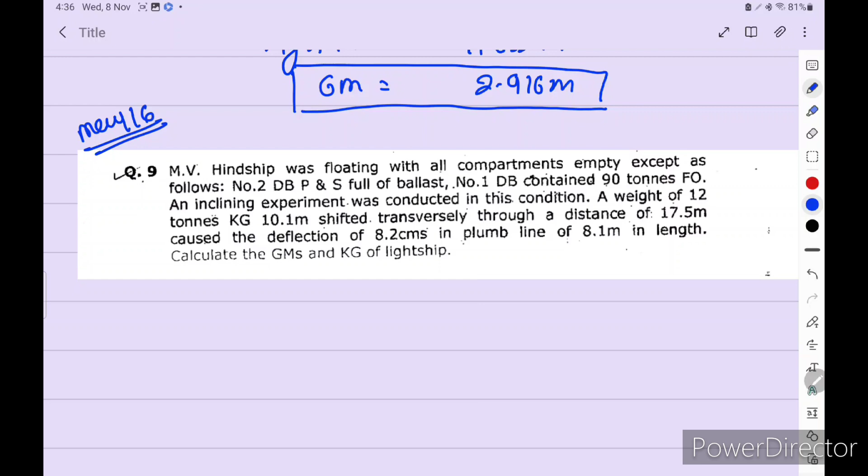50% is the passing marks, so you can easily clear. Let's finalize my final question for this video, so that the video is not so big.

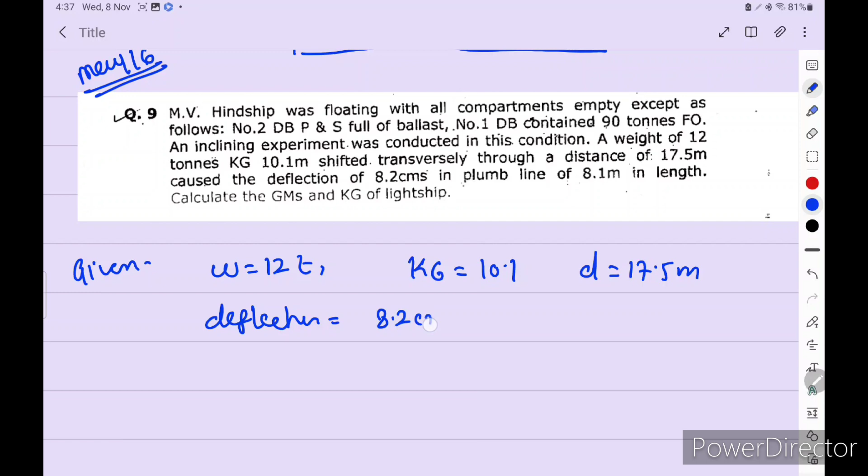Given in the question: W is equal to 12 ton, kg is equal to 10.1, d is equal to 17.5 meter, deflection 8.2 centimeters (need to convert into meters), and plumb line 8.1 meter. As the first step we have to find out the final displacement.

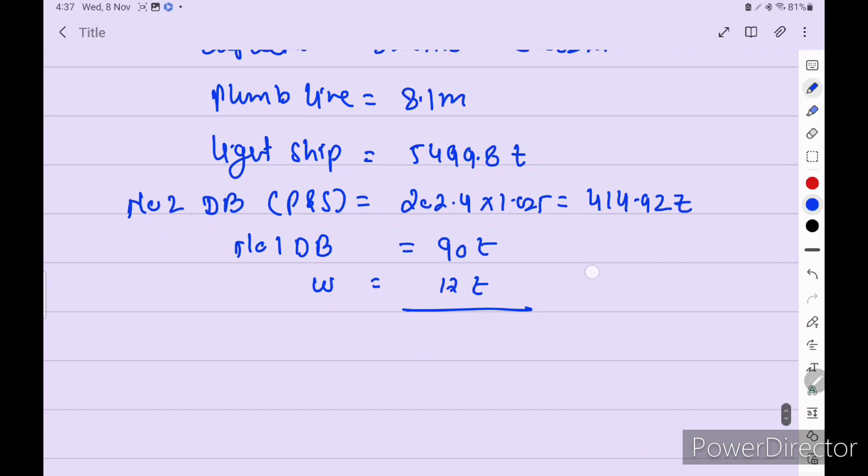Light ship is 5499.8 from condition number 1, number 2 DB port and starboard: 202.4 into 1.025 is equal to 414.92 tons. Number 1 DB is given as 90 tons, small w is given as 12 tons. We add all to get the final displacement.

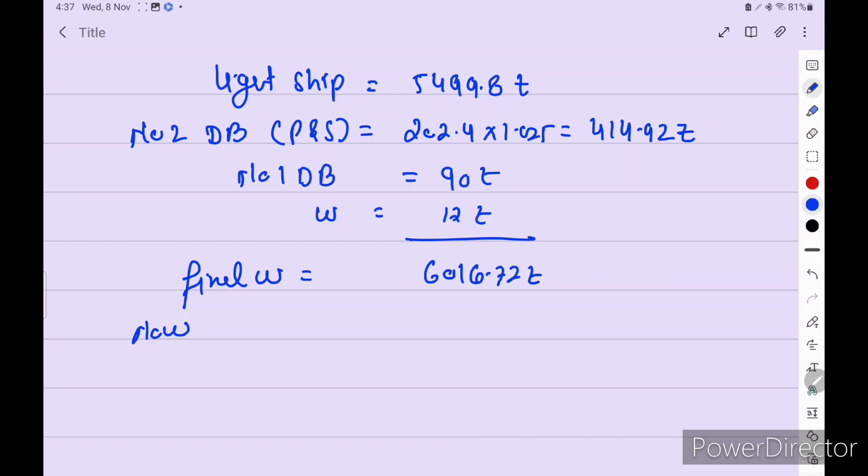Second step, we have to find out the GM fluid. So GM is equal to W into D upon capital D into plumb length divided by deflection. So GM is equal to 12 into 17.5 divided by 6016.72 into 8.1 divided by 0.082. So GM fluid is equal to 3.448 meter.

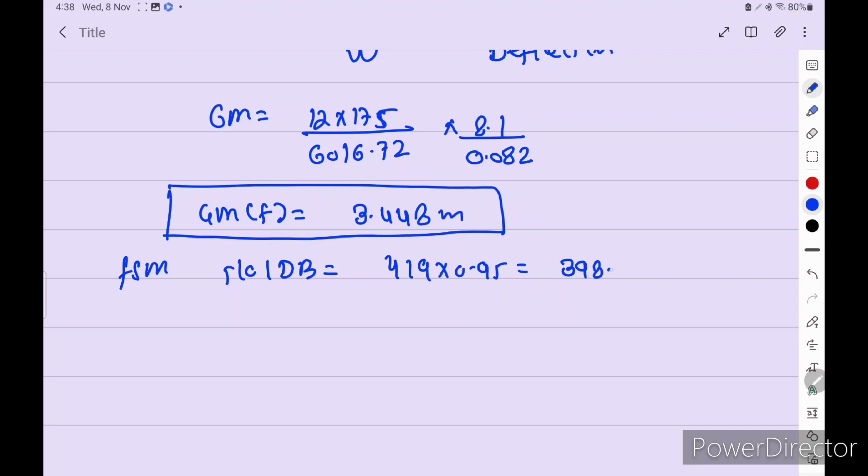Now third step, we have to find out the FSM. Number 1 DB: 419 into 0.95 is equal to 398.05. Now FSC is equal to final FSM divided by final displacement: 398.05 divided by 6016.72 is equal to 0.066 meter.

GM fluid 3.448 meter, FSC 0.066 meter. Add and we get the GM solid: 3.514.

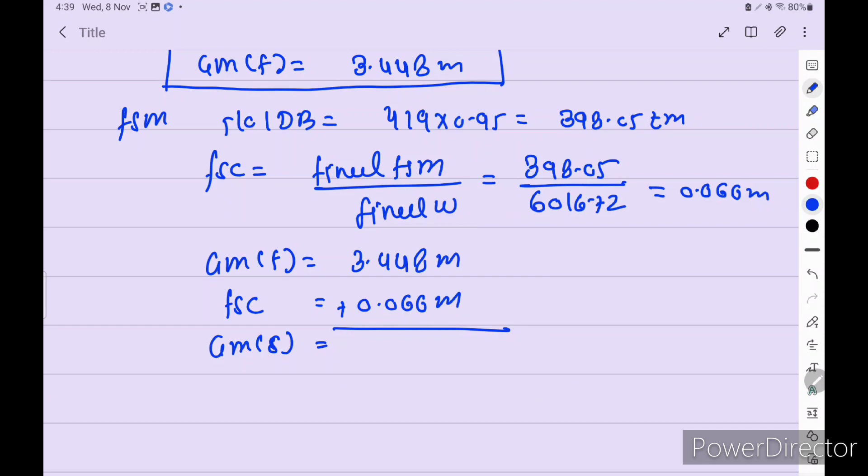KM from the MV Hindship particulars. kg we have to find out, final. Now go to moment method.

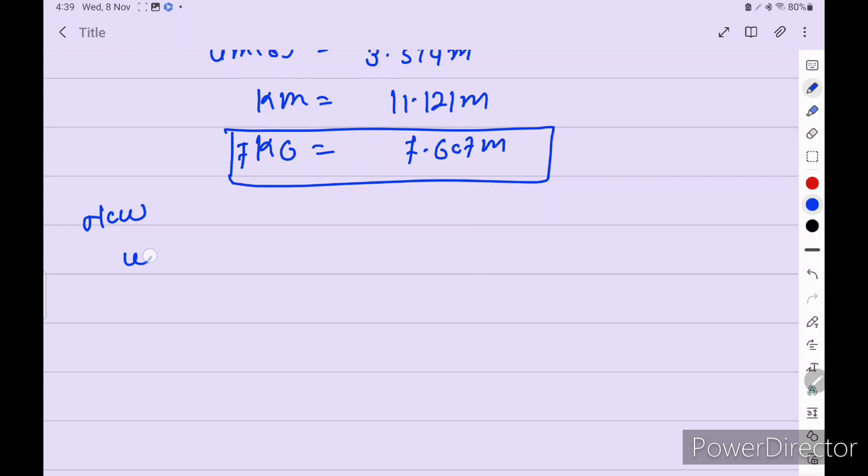We need to find out the light kg. 769.189 minus 414.92 minus 90 minus 12, so we get the light ship 5499.8. Put the value 0.65, 1.14, 10.1, multiply 269.69 minus 102.6 minus 121.2. We get 45275.699.

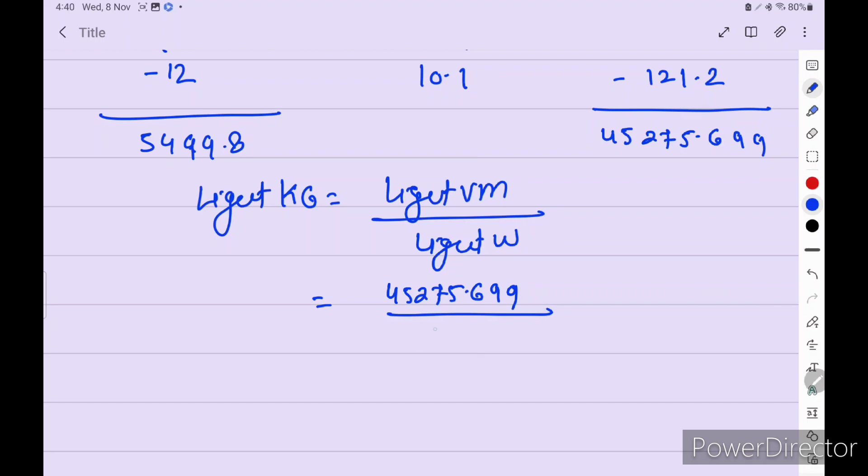Light kg is equal to light vertical moment divided by light displacement. So 45275.699 divided by 5499.8. So light kg is equal to 8.232 meter.

Light KM from the MV Hindship particulars we have to find out, or from condition number 1 you also get it. So light GM, which is required by this answer question.

If you see all these past papers, you can solve them and write your answer in the comment box, so then I can verify your answer.

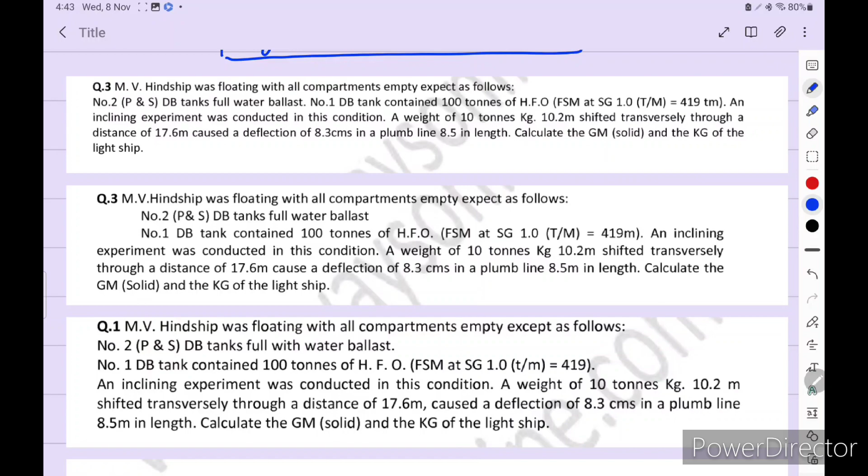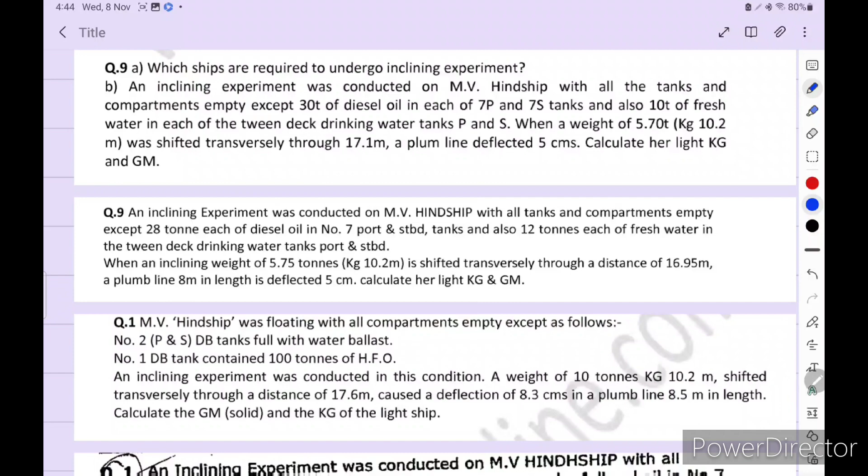This is all 25 marks and very simple. If you watch my video for 1 hour, you will easily get 25 marks, then you only need to score 75 marks also to clear this exam.